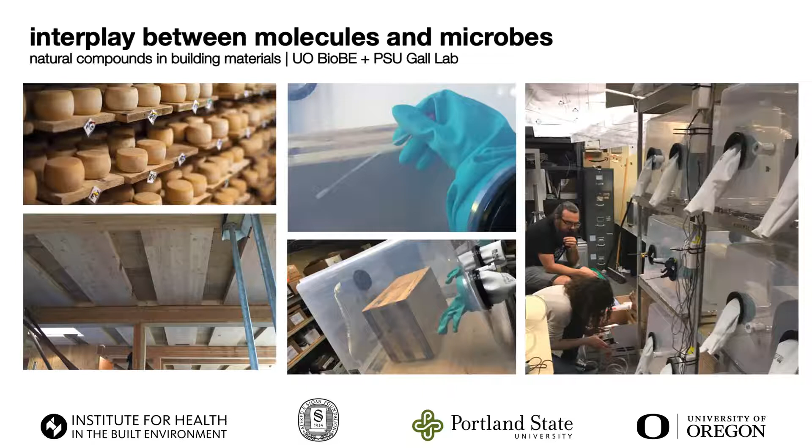So with that, we will start talking about a little bit of biology and mass timber, and specifically the mass timber microbiome. To set some context for what Kevin will present, I want to talk about a project we had, we still have going on. It's not completely wrapped up, but it's working together with Portland State, looking at how molecules and microbes play together with different building materials. In this particular project, we looked at 4 building materials: earth and plaster, painted drywall, mass timber (CLT), and concrete, and put them out in the office environment to let them get microbes from all of us in indoor conditions for a while.

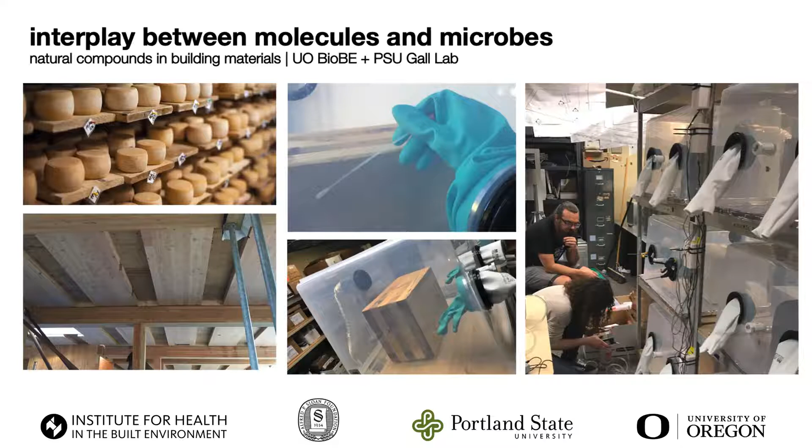And then after they were in the office environment, we put them into these microcosms, which you see in the image to the right here, and sampled on a regular basis the microbiome on the surface, as well as the air and the VOC content in the air, and paired those two data streams together to understand what was going on a little bit better. We were inspired, or at least I was inspired, by cheese making and how in Europe this has been done with wood intentionally for centuries, to be able to establish bacterial communities that would help the cheese ripen within the wood itself. So this was something we thought could be really interesting with mass timber buildings.

So we thought that was quite interesting, and dug into that a little bit more, and looked at the VOCs coming off of the different materials. Of course, with mass timber, you have a pretty strong signature of terpenes that the other materials don't have, and some other aspects about the material, such as surface topology of the mass timber structure, that's a little different.

So that said, we started looking at some additional literature and found that other researchers found similar things about bacteria on wood surfaces — that wood surfaces transferred bacteria less easily than smooth surfaces such as plastic or stainless steel, and actually had lower counts of viable microbes on unfinished wood, even lower than on plastic, and couldn't even be detected 48 hours later for Staph aureus on untreated beech wood.

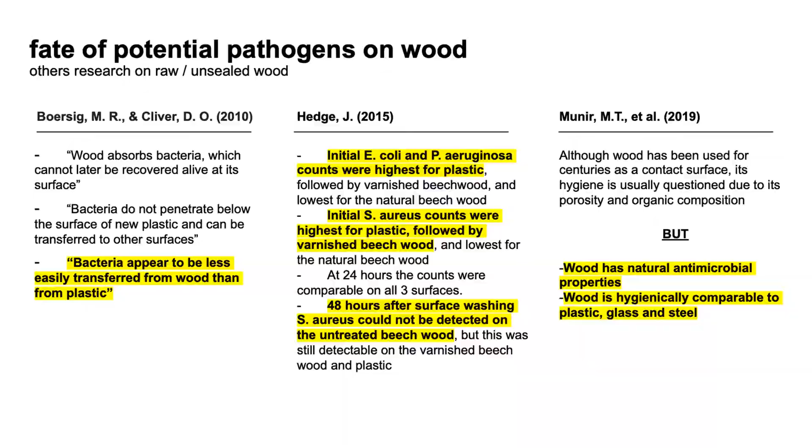There was a famous study in 1984 by Roger Ulrich looking at biophilia and view, and how that improved outcomes in healthcare settings. We're all aware of the biophilic aspects of wood and its patterns.

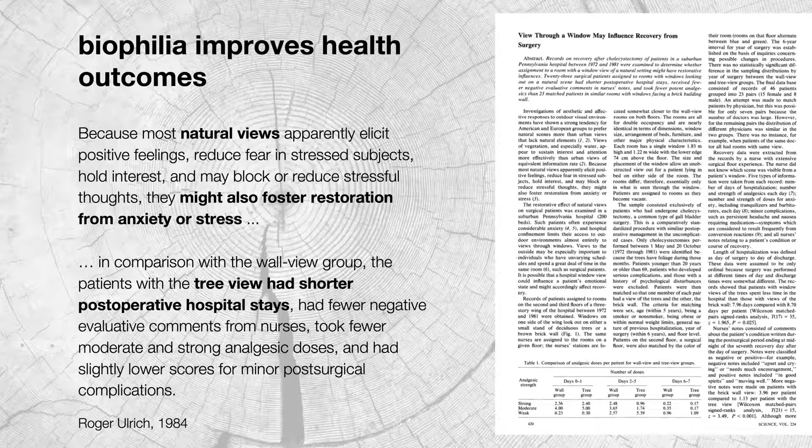So we started thinking about this and how this might translate into healthcare settings right now. Healthcare typically translates into more wood tones and plastic laminates made to look like wood. One of the big barriers, we believe, for not having real wood is the infection control issue, which is what these papers are starting to get at.

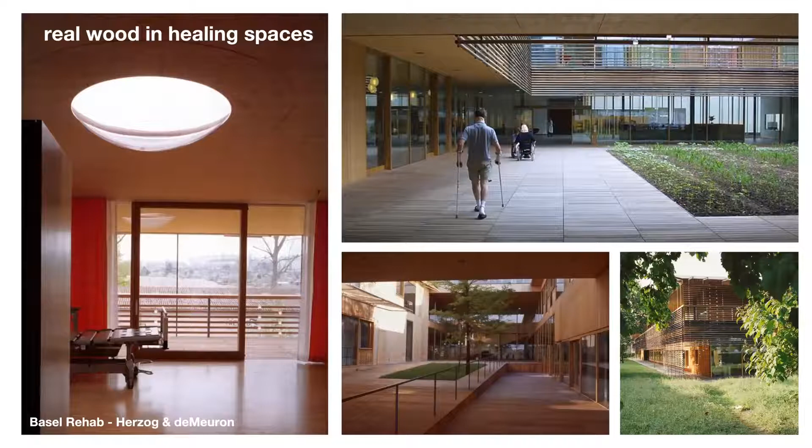So instead of using real wood in healthcare spaces, you see a lot of synthetic wood products. There is a concern about infection control, and that's really the work we're doing now — to understand how this product might be used in healthcare spaces, or other spaces, understanding how the microbial aspect performs. So I'll let Kevin start talking about that.

Yeah, I think this question and the potential health benefits associated with wood are many — potentially from antimicrobial compounds, natural inactivation, perhaps even flourishing a healthy microbial community to provide some natural defense mechanisms, as opposed to our current approach to hygiene, which assumes the goal is just to kill all the bad stuff.

Maybe there's a concept around fostering resilient communities that disallow the growth of nasty microbes. And then other concepts — Mark mentioned some of the aesthetic concepts that have shown true physiological benefits, not just aesthetic benefits. Turns out, if you dig deeper, scratch beneath the surface, there's a reason we like corner offices with wonderful views, and there's a reason we like natural materials.

And those reasons, I would argue, have historically been undervalued and oversimplified, written off as aesthetic luxury, as opposed to some sort of legitimate physiological value-add or microbial value-add. So I'm hoping the two projects I'm going to quickly describe will help further an evidence-based approach to understanding the health benefits associated with wood that I believe are possibly there.

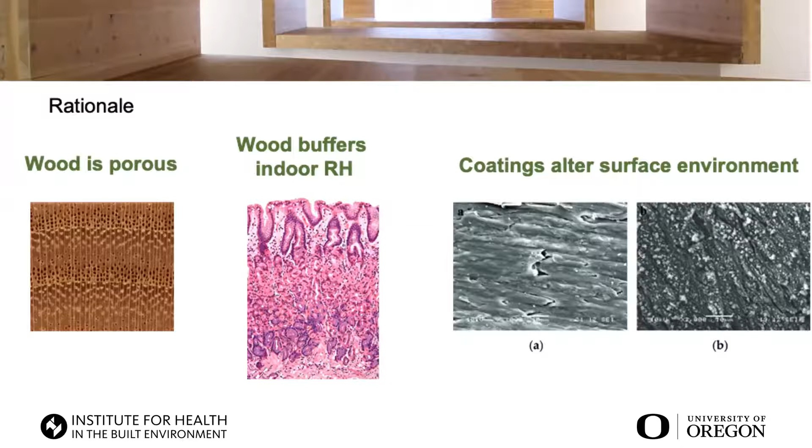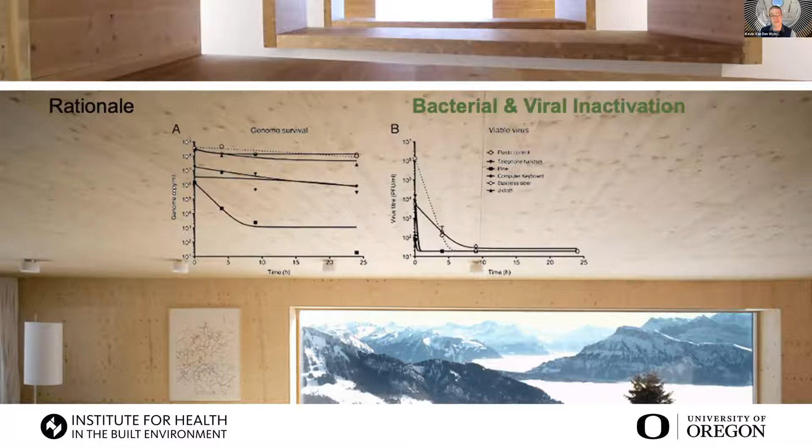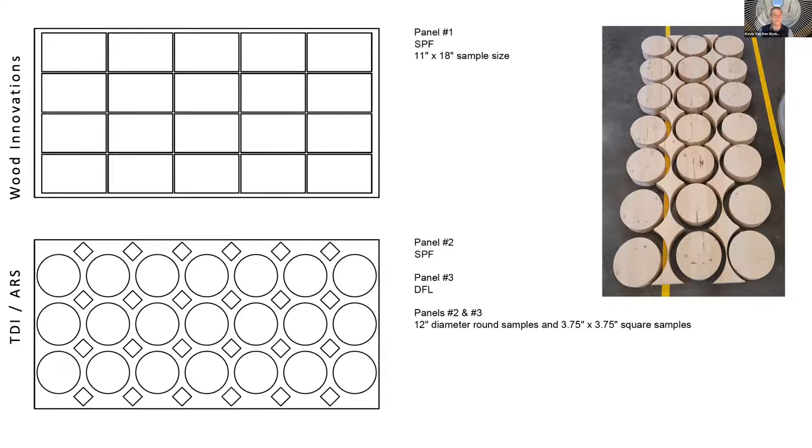The next slide illuminates these ideas a little better - Wood Innovations on top, ARS on the bottom. We get to use some fun toys for these projects. On top you see our microcosm chambers, which are poor man's glove boxes that we assembled - I don't remember how many we have, something like 15. Lots of controls, and then all our samples in triplicate. I think we've got negative and positive controls, three of each, and then our samples in triplicate, multiple material types.

For the Wood Innovation Grant, we're looking at just a spruce pine fir 3-lam coated with a Sansin KP12 product, as well as an uncoated product.

And then we need multiple versions of this because we have several different wetting events, to really drive at that concern around potential moisture in buildings. Think of these wetting events as trying to simulate leaks of different intensities, or perhaps even a soak or a long-term leak, either from a job site, construction process, or a long-term leak or flood that might completely saturate certain pieces of the wood. Those are the kinds of scenarios we're looking at.

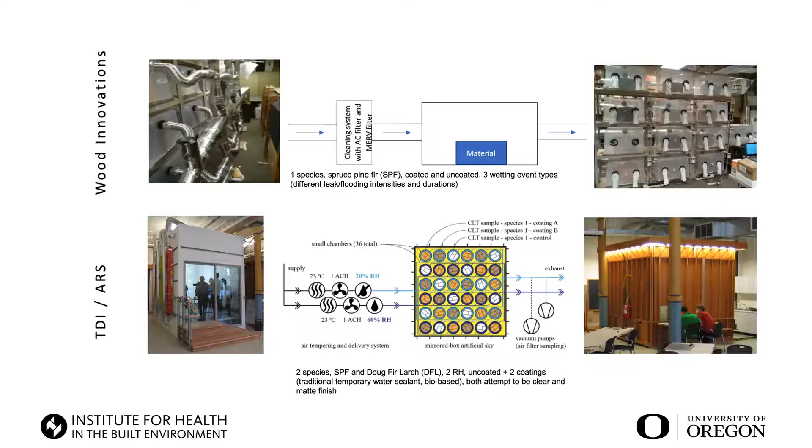So switching now to mass timber acoustics. So why acoustics?

And I know this is an abrupt shift from the microbiome, so I apologize. Whiplash. We have really kind of three hour-long presentations in one here.

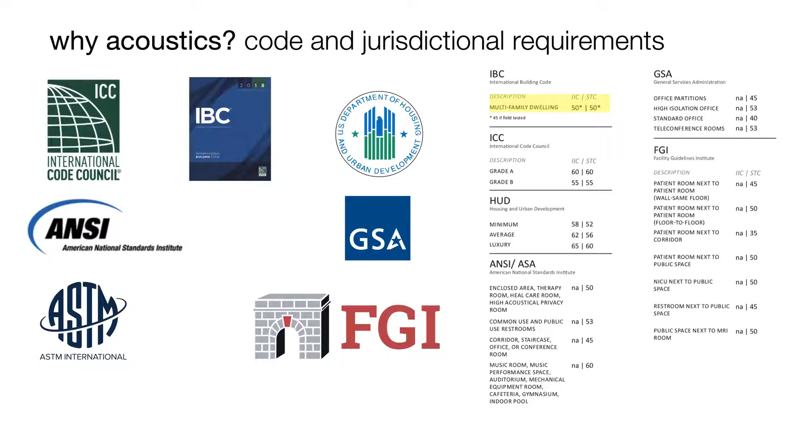Well, acoustics are important not just because there are a lot of code regulations and jurisdictional requirements, but we also know that acoustics in buildings increasingly have an effect on health. There are guidelines that have come out from the World Health Organization in Europe outlining a number of health effects due to acoustics. As cities get denser and people live closer together, acoustics are more and more important to keep us all happy and keep tenants happy and rents stable, so that people want to stay where they are.

This is becoming more and more important. It turns out also that a lot of times, with improved acoustic performance, you get improved energy efficiency just by better wall assemblies and windows and such. So this is something we've been interested in due to the health and energy aspects.

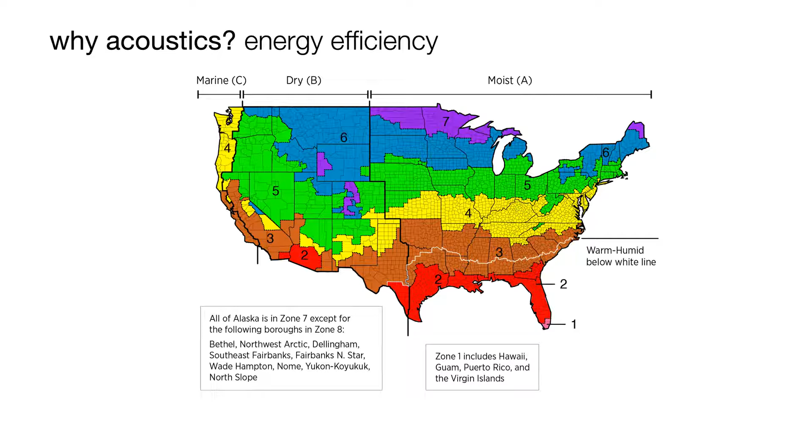And of course, mass timber we're all interested in, but mass timber—wood is a great material for musical instruments because it's resonant. So that makes it challenging to do in these types of situations. So we undertook a couple of different studies to really start to understand how we can get the best of both worlds: the mass timber visual aesthetics and the acoustic performance.

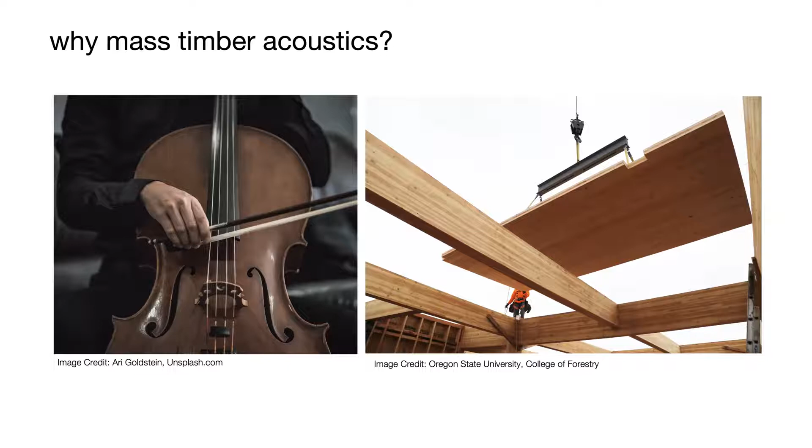So this is maybe not the right sequence because Kevin only has enough time—I want to have him talk about the way we can test this and what we're trying to do at University of Oregon. Yeah, so it seems like the theme for tonight is going to be: I'm going to talk about what we're about to do, and Mark's going to talk about what we've actually done, which is actually kind of fitting because I spend more of my time trying to figure out what we're about to do.

Anyway, one of the big things we're about to do is build a world-class floor-ceiling acoustics test laboratory, and I couldn't be more excited. This will be the biggest project I've ever had the chance to sort of conceive and maybe use that analogy, birth, and hopefully build and grow into the world and make something of real impact. So I'm really excited.

The goal here, as we started to explore the challenges facing architectural acoustics with regards to mass timber, the obvious multifamily housing opportunity as a really great target market for mass timber products was there. And the obvious problem with that, among a few others, but one of the major ones is noise trespass, especially at higher end housing markets.

Now, I'm a big believer in equality and in spatial justice, and so I want to find ways to create low cost, high performance acoustic assemblies so that all income brackets can afford to have a wonderful mass timber building that also has good performance from an acoustics perspective, and we don't have to have the stress.

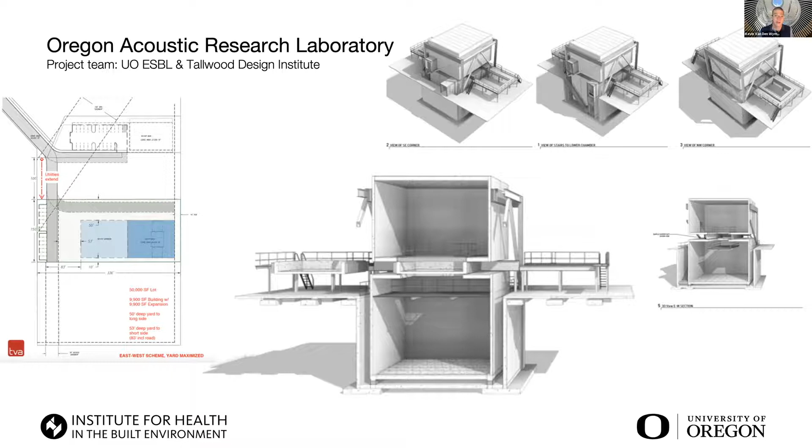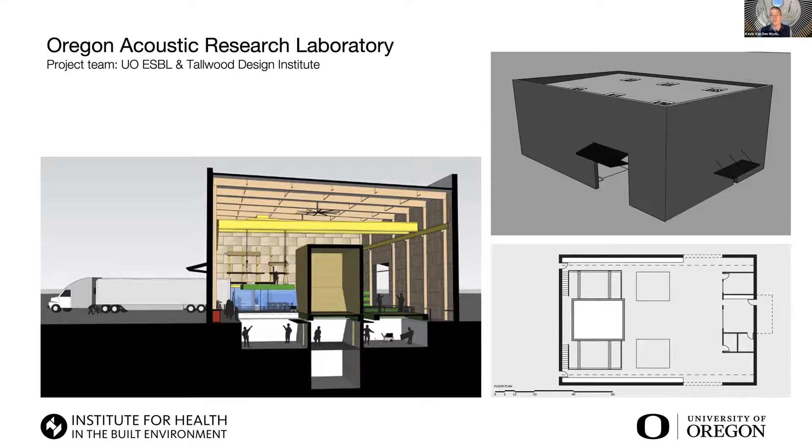The next couple of slides just show a little more visuals of the concept of how it might fit inside of a building, and some of the activities. And of course, we branded the final one with TallWood there. It won't be a wooden box. It might have some wood on the outside of it, but they're large concrete boxes, very massive in nature.

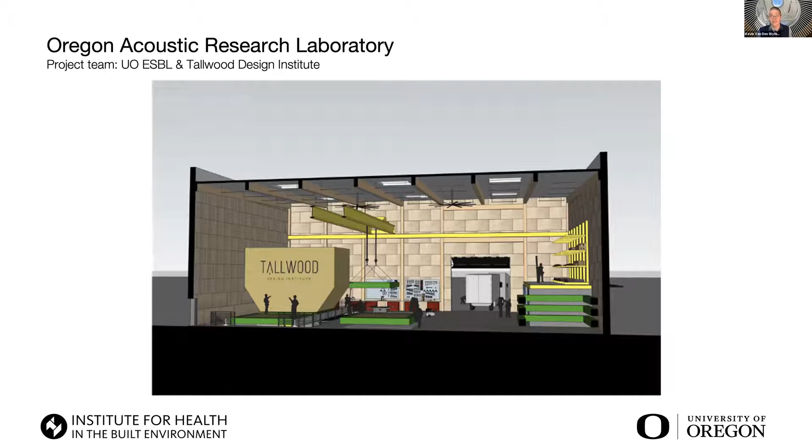Perfect. Another day. Thank you.

Thanks, Kevin. So why don't I continue? I'm going to show the lab testing that we did and some field testing, and then I can answer questions at that point. I also have a smaller presentation on a larger project we just started that I want to share at the end. So I definitely want to leave some time for questions.

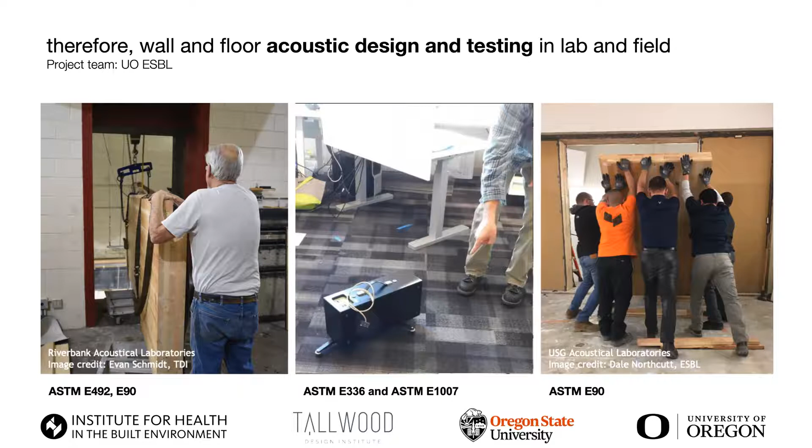To begin this, we wanted to understand what we should even test and why. So we started by developing a survey, going through the existing literature, everything we could find, a lot of what was published by Woodworks and by different acoustic product manufacturers at the time, and gathered that information, plus as much Canadian information as we could find. It was important to us that we developed assemblies that industry really wanted, that we were hitting the right target, and that we were testing to ASTM standards so they could be adopted by jurisdictions here in the US.

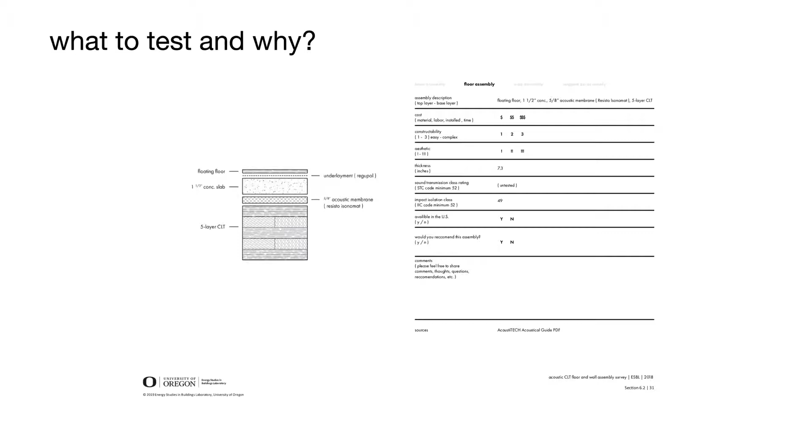So we got that survey into the hands of probably a lot of you on this call - contractors, architects, engineers, acousticians, some developers. What we heard back was primarily: we want to use generic materials, we don't want to be bound by proprietary assemblies, especially as we go through value engineering. We'd like to have third-party testing, even if testing already exists, just to make sure these assemblies are verified independently. And use as little wood fiber as possible.

Ideally, develop 3-lam assemblies that are quick to assemble. The mass timber should be visible and not encapsulated. And we should also get some data on the structural composite, which we saw last week on this call, for the high seismic areas.

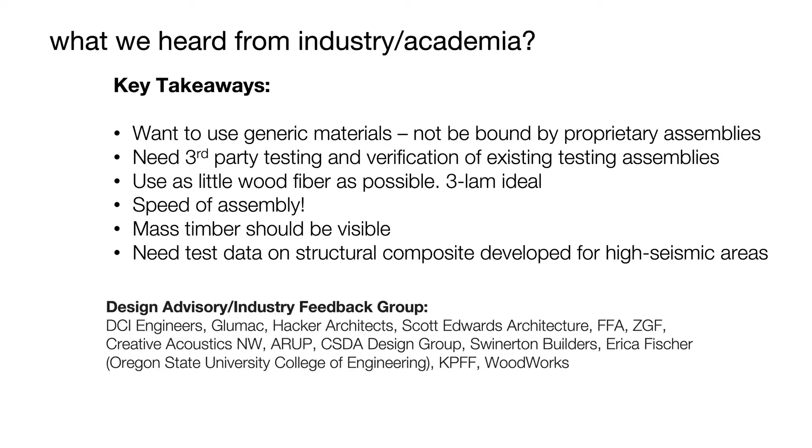So we got that survey back, and from that we developed a few assemblies in CLT - I don't have drawings here, but we tested these. At the end we added MPP as well with the same assemblies, which you'll see in the results. We have the structural composite, then the same setup with a wood floating floor topping, and another one where we add an acoustic mat and a build-up in the floor.

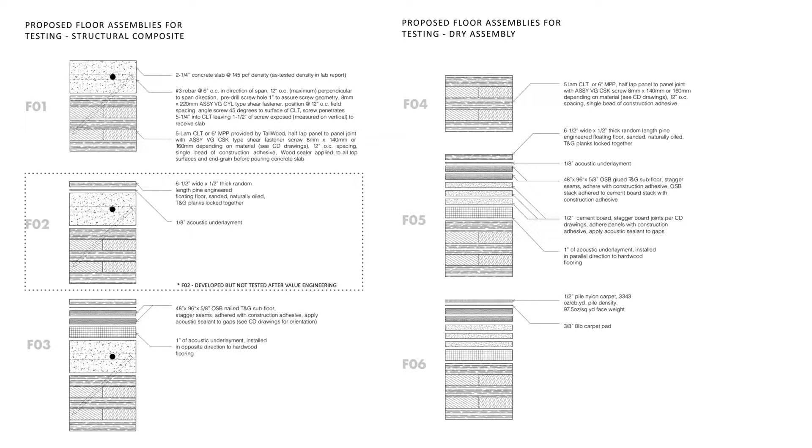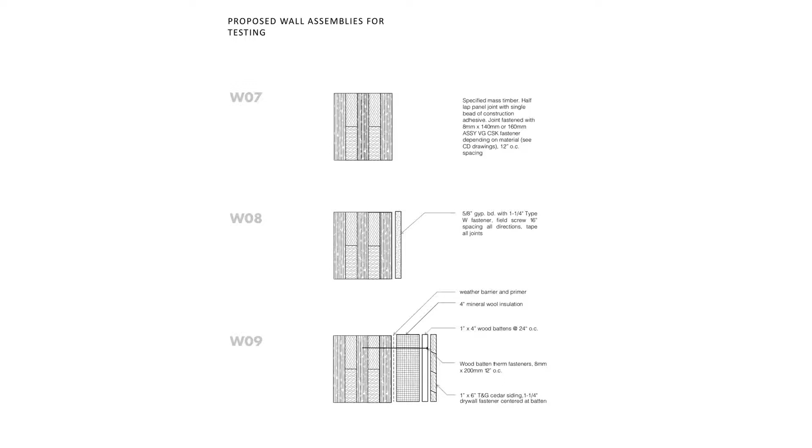We also heard a lot that most people surveyed wanted to try to eliminate wet trades, and what that might look like in an assembly. So we did an assembly using cement board built up with acoustic mat underneath, with a couple of different toppings on that to test as well. Those were the floor assemblies. For the wall assembly, we tested first bare CLT, then added drywall, then added a rain screen, thinking about how this might be used in that configuration.

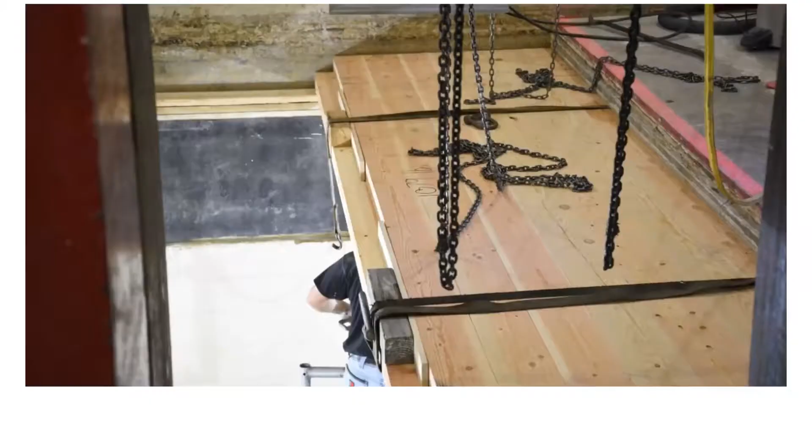Here are some images - I wasn't on site myself, but Evan was there together with Dale Northcutt from our lab, and they provided great images so we could understand how this went down. I'm sure Evan could help answer questions about the actual process on site. You can see we've got two chambers, with a big hole between them and heavy double walls for sound isolation. And because the doors were so small, we had to bring panels in as two pieces and use a lap joint.

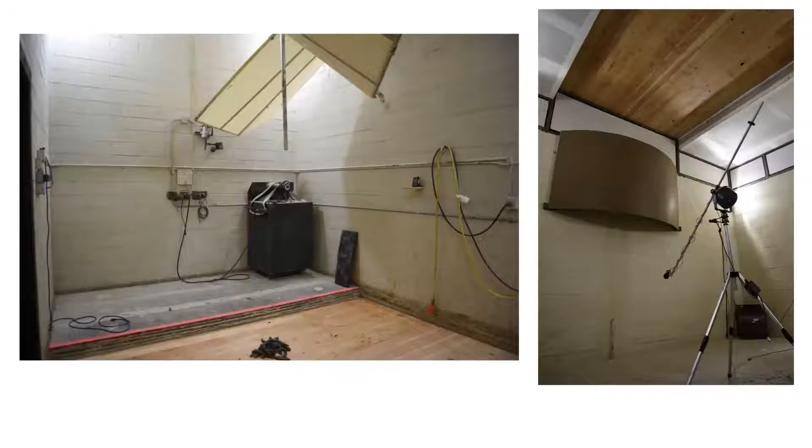And then you can see the process of just building this assembly up in the chamber. They use some putty to pack the edges with sand for density, to seal around the edges. And then they have a sound transmitting chamber on top and a receiving chamber on the bottom with instrumentation. So that's for the STC tests.

For the impact class tests, there's a calibrated weight testing machine, I guess you can call it, that drops these calibrated weights onto the sample, and then the sounds are recorded below.

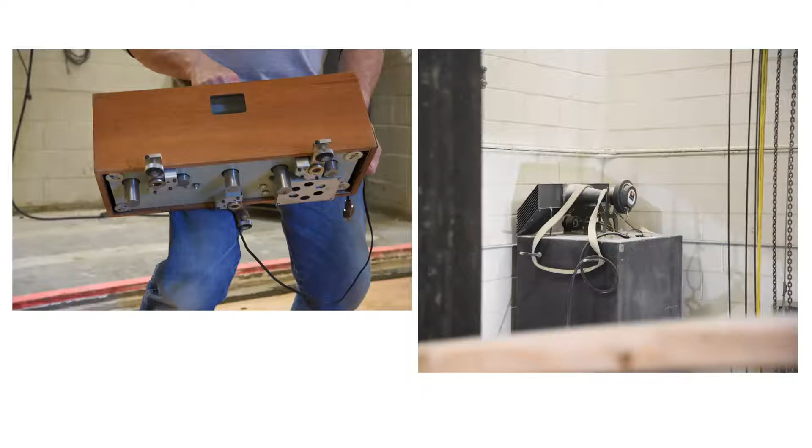Here you can see the dry assemblies being built up. We did the final tests with and without carpet. Carpet is pretty amazing, and how well all of a sudden that can perform.

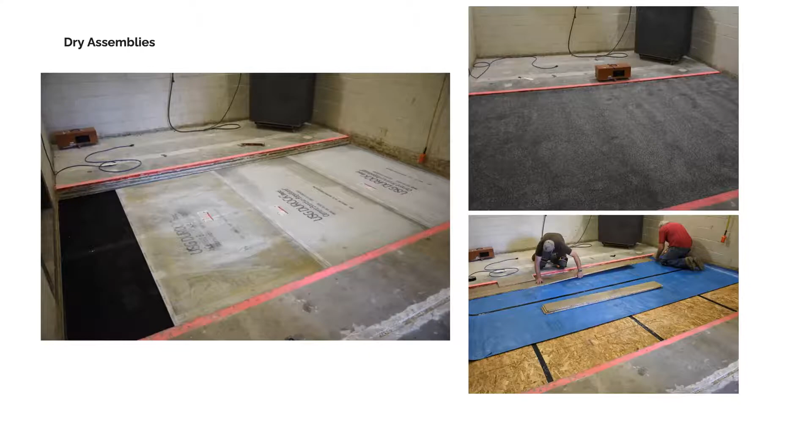So if you build this in the chamber itself, that's one of the problems. So the lab that we're developing will allow these cassettes to be made to the side and then slid in and out so that you can have higher throughput.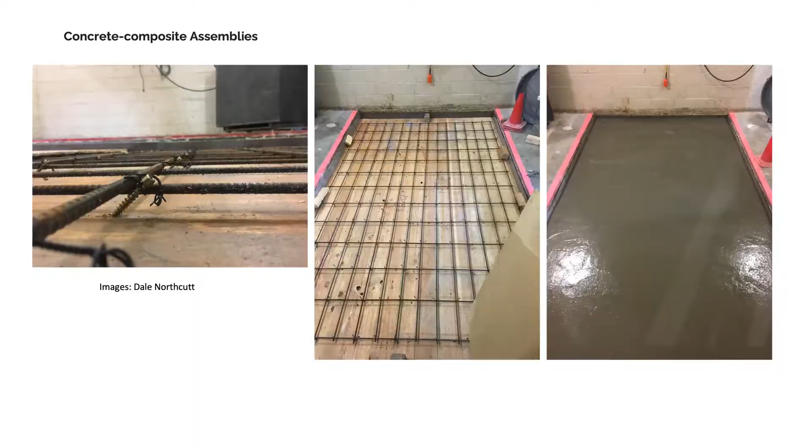So you can see here's the MPP, and the results are on this slide. You can see the MPP and the CLT were not exactly the same thickness, and this likely affected the performance between the two. The CLT was 6 7/8 inch 5-lam, and then the MPP was thinner, it was 6 1/8. So there are some differences there.

So the IBC code requirement for housing is 50 for STC and IIC. You can see that dashed line there to understand in the lab test how would these perform, and would they meet housing requirements. And you can see the structural composite with the acoustic mat and the floating floor would meet that and actually performed really high.

Same for the dry assembly, and adding carpet, of course it performs really high in the impact category. Strangely enough, you can see as soon as with the concrete, the topping in the structural composite, it actually performed worse in impact than just bare MPP and CLT.

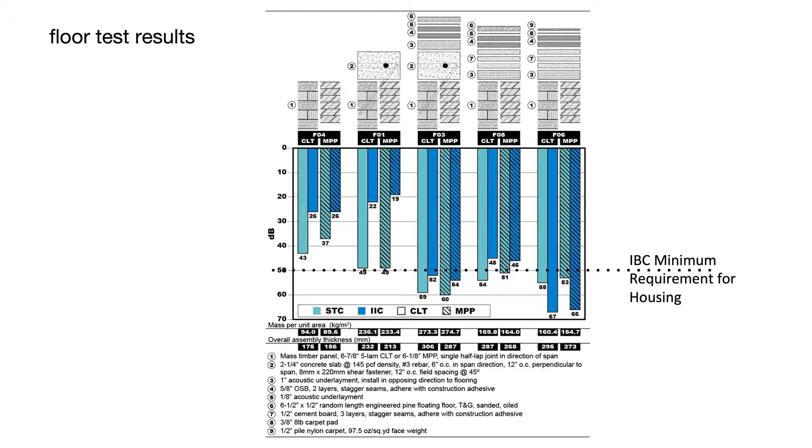And so, by the way, there's a report on TallWood's website that has this information if you're looking for it.

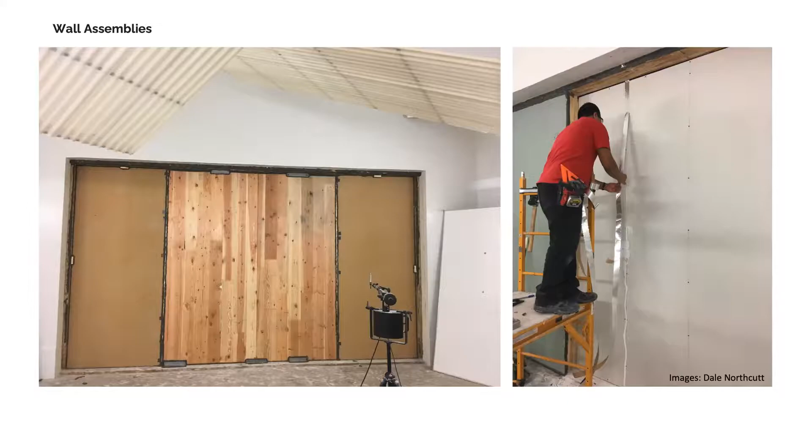So in the wall assemblies, you can see, this was actually done by USG, and the other one was done by Riverbank in Illinois. The wall assemblies just being vertical, and we had weather barrier or rain screen configuration here, and the wall assembly results are as follows.

And one of the performance indicators here is OITC, that's an outdoor-indoor transmission class that applies to exterior walls. There's not usually a code requirement, but the higher performance would give you a better sound isolation. So that's something we wanted to look at as well, given the slides I showed about better performance in higher density cities and health benefits.

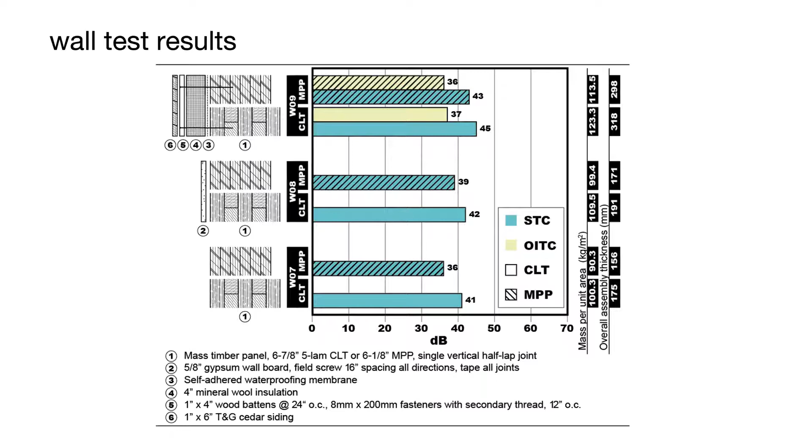So of course, those are lab tests, best conditions, although we had to place a joint in the panels due to the size. It's, of course, never the same as actually going out into the field and having penetrations between floors and different conditions at the panel edge.

So we wanted to test some assemblies in the field and compare how these performed to our lab tests. That is more challenging than it seems.

One of the most challenging things about it is just finding research settings where tenants are okay with you getting into the space on both floors. Sometimes you'll get a tenant that's okay with it on one floor and the tenant on the other floor was not okay with it. We went to several buildings where just the size of the spaces were wrong and didn't meet ASTM. We found building owners that wanted to know the results, but didn't want us to do the test because they didn't want that information out there. So typically we had to promise that we wouldn't identify the building.

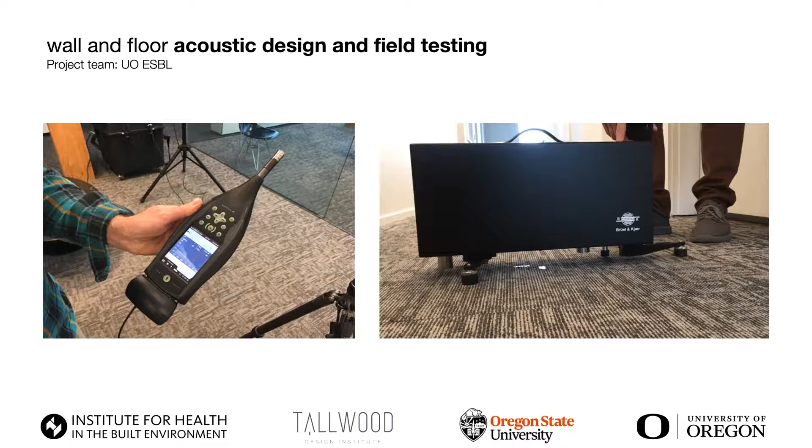So the buildings we tested were 3 different ones in the Pacific Northwest. And the assemblies that we tested were a CLT concrete composite assembly, a structural composite assembly, a heavy timber assembly with a concrete topping, and an NLT assembly with a concrete topping. So those are the 3 different ones.

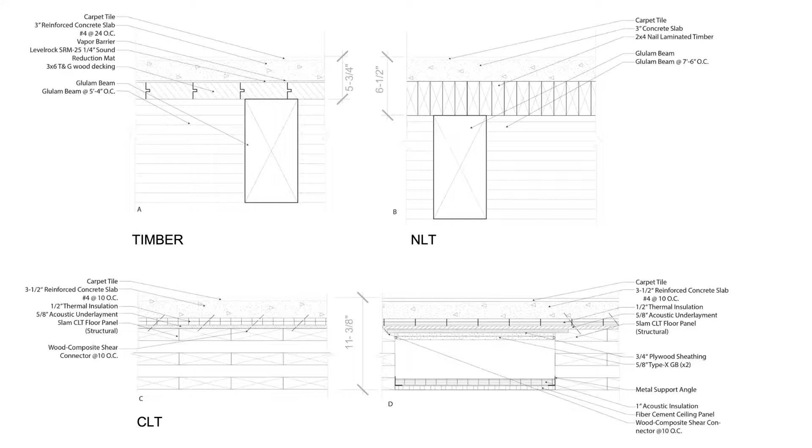You can see what this involves, and a lot of times it's getting in there when a space is finished, construction complete, but tenants haven't moved in, or it's weekends or early morning.

We got kicked out of one space because it's really loud and people were working on a Saturday, so we had to come back another day. So those are the challenges with testing in the field.

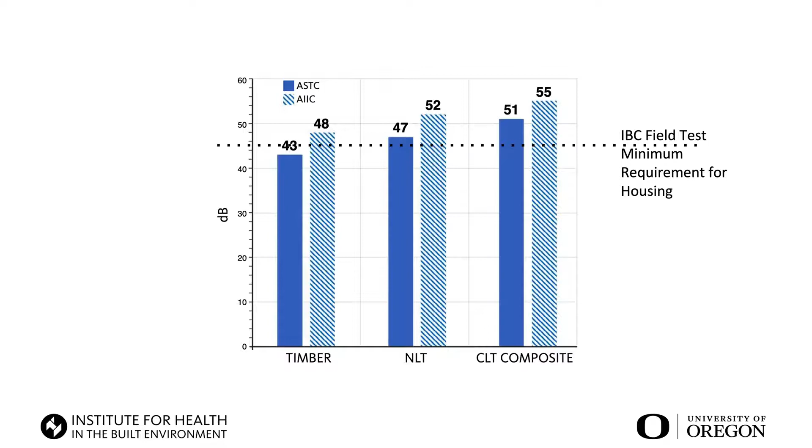But what we found with the tests in the field was that they performed pretty well. In fact, the IBC field test requirement has a derated factor for that performance versus lab performance. So to meet housing requirements, you got to hit 45 in the field versus the 50 in the lab. You can see from the graph that the NLT and the CLT composite both would have met that requirement, and the heavy timber is very close. Given all the complications of flanking and penetrations in the field, they still performed really well, so that was good to see, and good to compare with the lab tests.

I just want to acknowledge, this was a large team effort, with funding provided by TallWood and ARS. The facilities for the lab tests were Riverbank Acoustical Laboratories and USG, and a lot of industry feedback helped us really hone what we wanted to do.

So I'm going to pivot a little bit and talk about these tests. It's pretty expensive to do them. You can imagine the cost to create the assemblies, travel costs, to get all that set up - it's not inexpensive. So you want to make sure you know what you want to test and why.

For designers, we want to be able to iterate on designs and come up with new concepts faster. What we are developing - this is an example from a test, a little test box we had in a class to demonstrate different assemblies to students. We want to design a better small acoustic chamber to test small assemblies in a more iterative, rapid fashion. It won't be any kind of ASTM test, and we'll miss low frequencies, but we think we can get better feedback for design iterations.

We want to test recycled materials. We want to look at the carbon in the assemblies and see how we can get to lower carbon assemblies. This was funded this year by TallWood and ARS, and we'll be launching into this very soon, having it available in our Portland lab to do this work, and to work with firms in the area to help iterate on designs before we scale up to full scale testing in an ASTM certified lab.

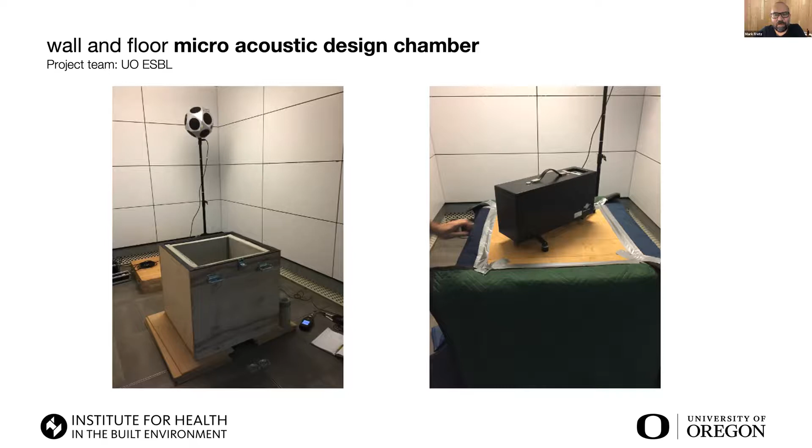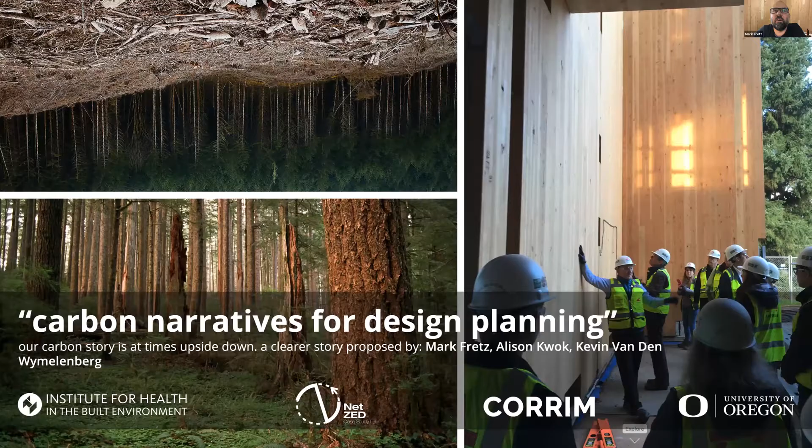I want to talk a little bit about our last project that we've launched. We started it officially about 3 weeks ago, but it's been cooking for a lot longer, and we've been working on these issues for a lot longer. I know they're all important to everybody here on the call. The project is called Carbon Narratives for Design Planning.

This grew out of several of us: Alison Kwok, co-PI; myself; Kevin, co-PI; and Judith Sheine have been working with students doing whole building life cycle assessments over the past few years, and also with industry partners out there, working on real projects and doing assessments.

We're starting to understand what the issues are when we look at carbon in these projects, and how that story is sometimes confusing for designers and hard to understand when we want to make decisions. Designers have a big role to play in carbon in our built environment, from the design and construction side to the operation of our buildings.

The materials we select are huge, and there are so many material issues to consider, such as where aggregate is coming from, how it's being mined for concrete, the emissions in cement production, wood, forestry, and all the pathways for end of life.

So we know that we have a big role to play in the climate change story, and a lot of that is thinking about the embodied carbon in the materials that we choose.

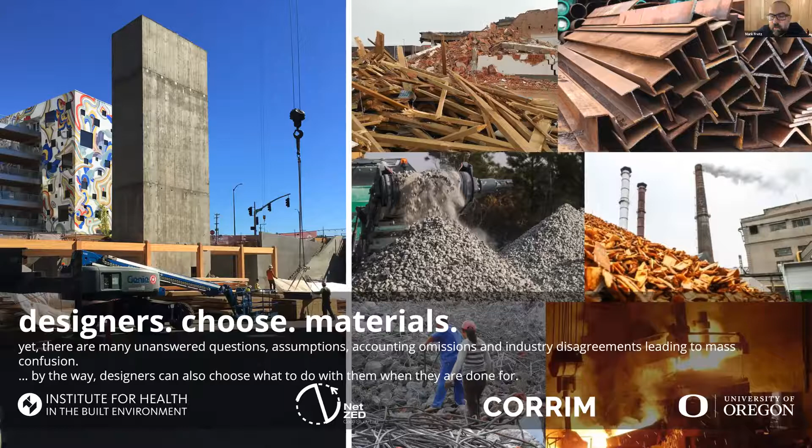There are a lot of tools being developed to help designers do that. A couple of the more popular ones are Tally and Athena. These tools are great, but when we start to use them and look at the results for mass timber assemblies, there can be really wide disparities for the biogenic carbon piece.

As designers, we want to be able to understand really what the story is more clearly, to select materials well. Because there are so many variables in a project, we want to be able to understand this piece of it more readily.

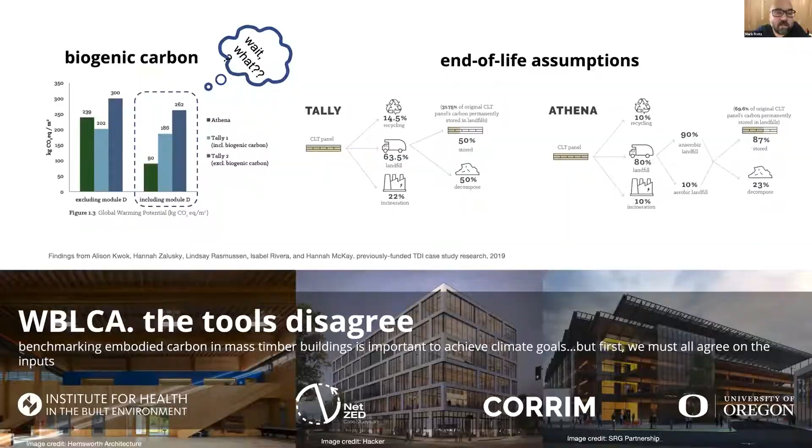So the goal of this project is to bring together designers and scientists, industry and government to think about where the gaps are that are causing this disparity in the carbon story. What are the issues? What are the assumptions, and where are we getting that data for the assumptions?

What do we know? What do we think we know? What do we not know? And we're trying to get a common narrative so that we can all understand together what that story is.

This is going to result in a group of experts coming together for an initial workshop in April, right after the Mass Timber Conference, and then a follow-up series of work sessions. Right now we're developing a survey that's going to go out to the AEC community and manufacturers, so we can start gathering the current state of knowledge.

We're doing a large literature review building on work that co-PI Alison Kwok has already done. We're going to get that all together and then look at not just North American forestry, but European forestry practices too, since we know a lot of panels are coming from abroad, so it's not just U.S. products we need to focus on.

So that's the goal, and we're going to think big and globally, considering the supply chains that everyone's using. The output goal is to develop education, a handbook hopefully, that would be useful for designers in the studio, or some form of guide, so that this information is clear and we understand the carbon content of wood without such a wide margin of uncertainty.

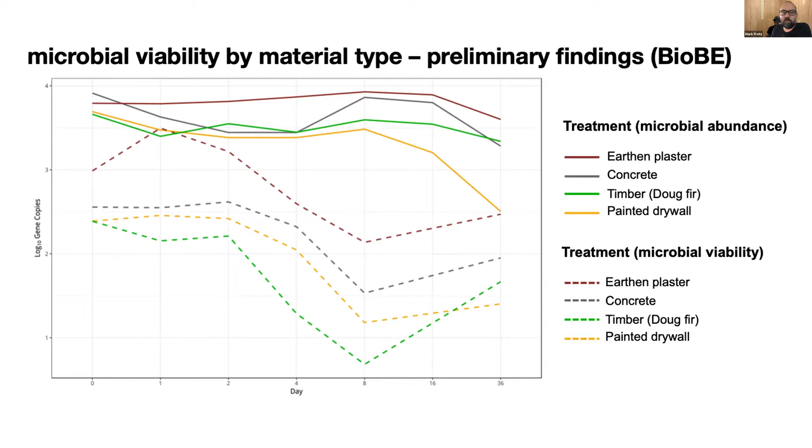Just a comment on the Douglas fir, which is a moderately durable wood. So that might be accounting for some of your microbial changes, because it does have chemicals that will affect microorganisms fairly well. Yeah, the CLT that we tested was Doug fir for our preliminary study. It'd be interesting to see what happens if you put a pine on there or something with different properties.

In this test, the biologists who are not architects coated it with linseed oil, and so it is quite attractive to fungi as a food source. We actually had a mycologist be the one that coated that too.

But we want to do it differently this time. We're going to do it without any coatings, and then of course with some different coatings. And Elliot Gall's lab at Portland State is the lab that's going to work with us again.